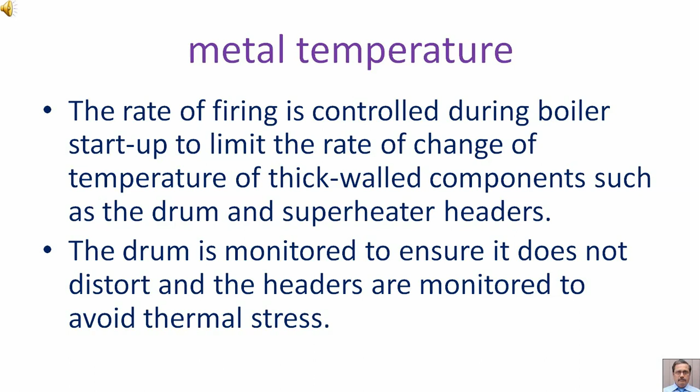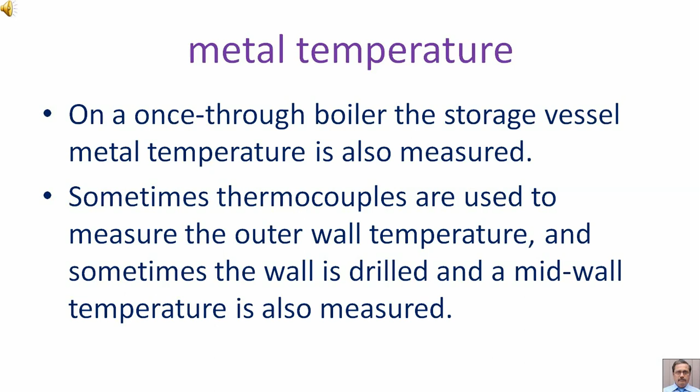On a once-through boiler, the storage vessel metal temperature is also measured. Sometimes thermocouples are used to measure the outer wall temperature, and sometimes the wall is drilled and a middle wall temperature is also measured. Metal surface temperatures can be made using a standard type K thermocouple.

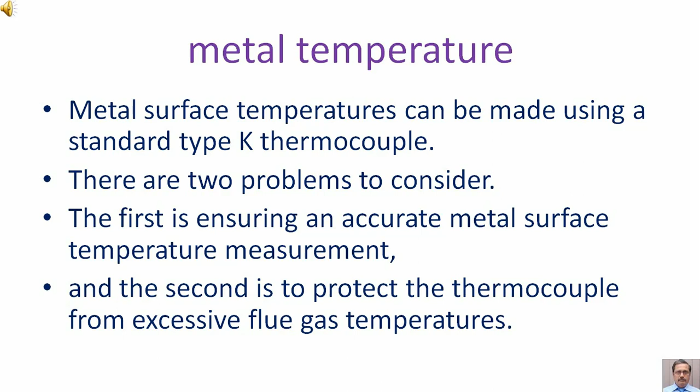There are two problems to be considered. The first is ensuring an accurate metal surface temperature measurement, and the second is to protect the thermocouple from excessive flue gas temperatures.

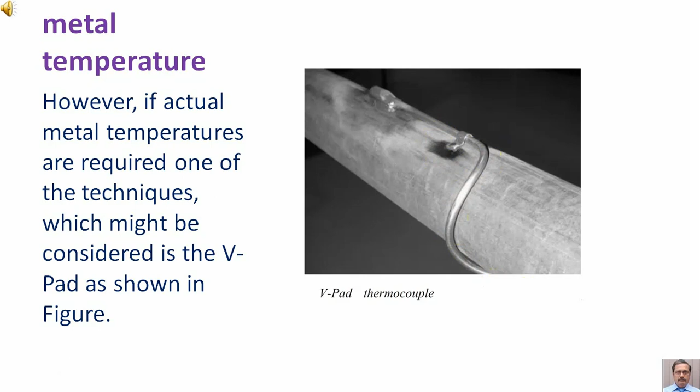The sheathed cable is clamped firmly to the surface of the tube with the help of tube clip. The other end of the sheathed cable is going to be connected to the appropriate measuring instrument. The V-pad claims that clamping the thermocouple to the tube is sufficient to protect the thermocouple from heat of the furnace gases.

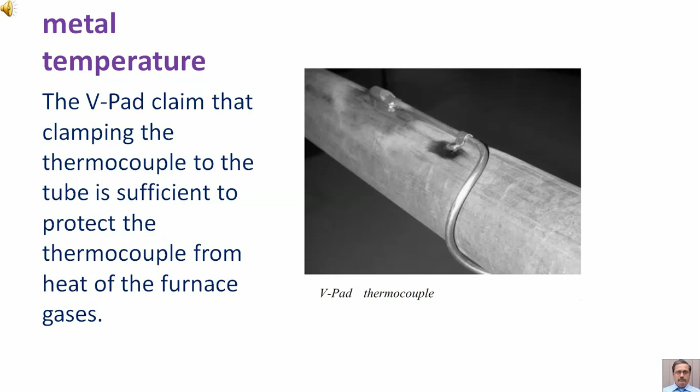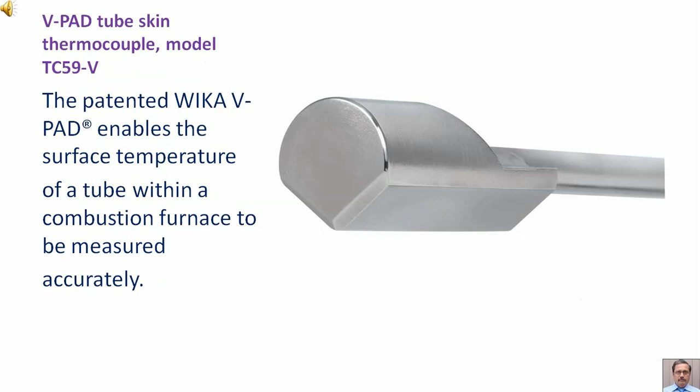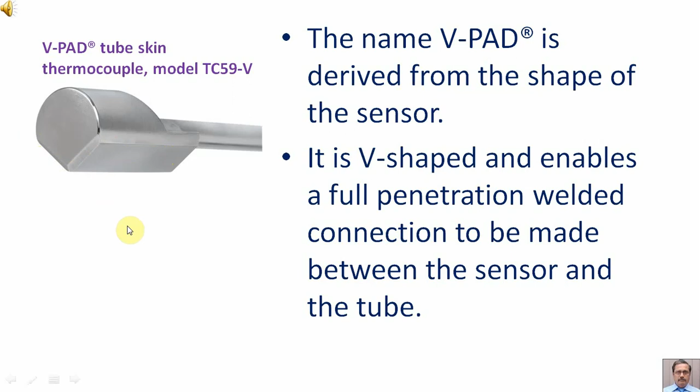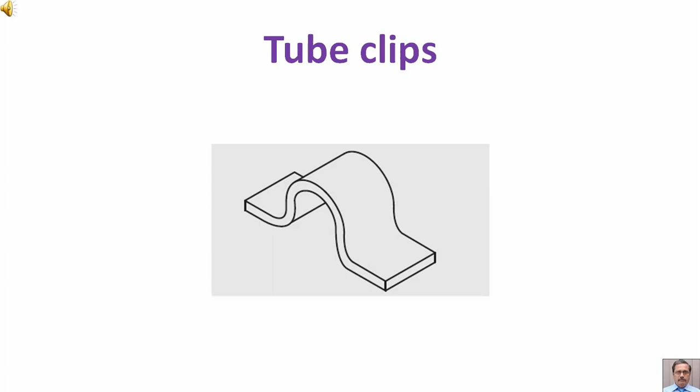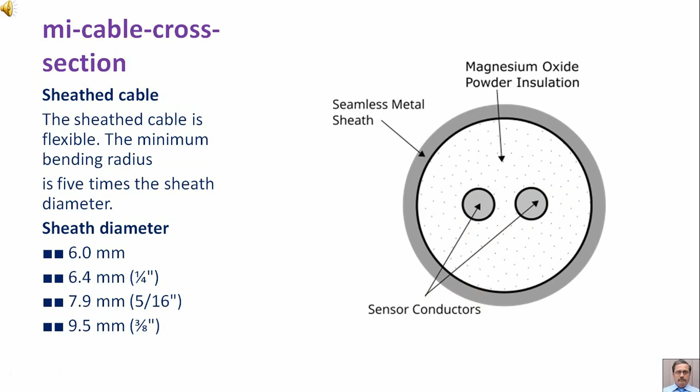V-PAD, the flexible part of the sensor, is a mineral insulated cable, sheathed cable. It consists of a metal outer sheath which contains the insulated internal leads compressed within a high density ceramic composition. The internal leads are made from thermomaterial. The material of the outer sheath can be selected to match the application.

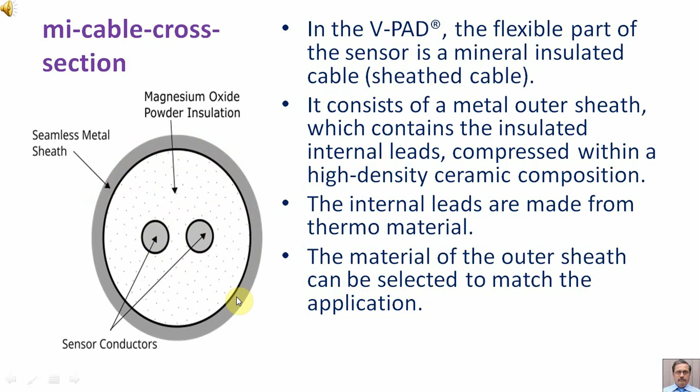At one end of the sheathed cable, the internal leads are welded together to form a non-insulated grounded measuring point. At the other end of the sheathed cable, the ends of the leads are connected and the sheathed cable is hermetically sealed using a sealing compound.

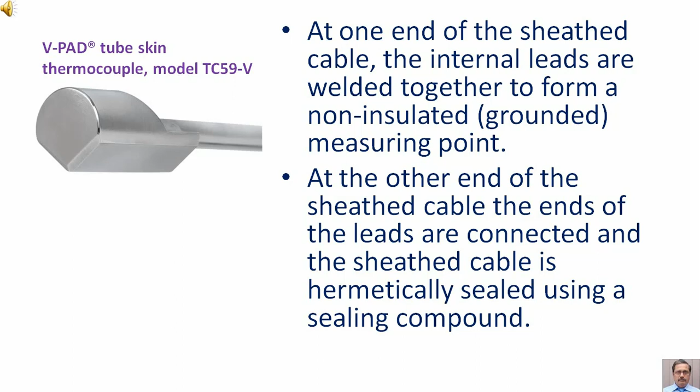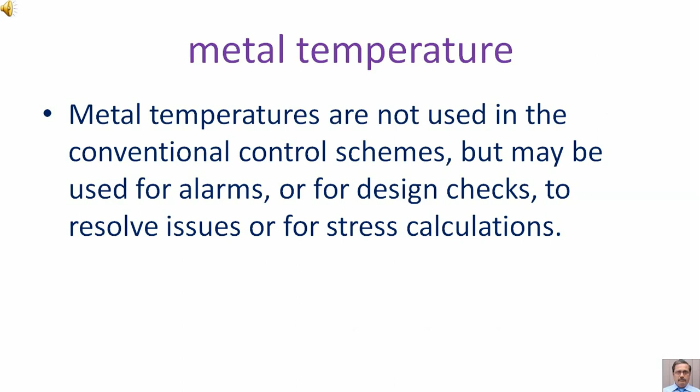Metal temperature. Metal temperatures are not used in the conventional control schemes but may be used for alarms or for design checks, to resolve issues, or for stress calculations. Following standards define thermocouples. IEC 60584 Part 1: Thermocouples, basic and tolerance values of the thermoelectric voltages.

IEC 60584 Part 3: Thermocouples, thermocouple cables and compensating cables. ASTM E230: Standard Specification and Temperature Electromotive Force (EMF) tables for standardized thermocouples.